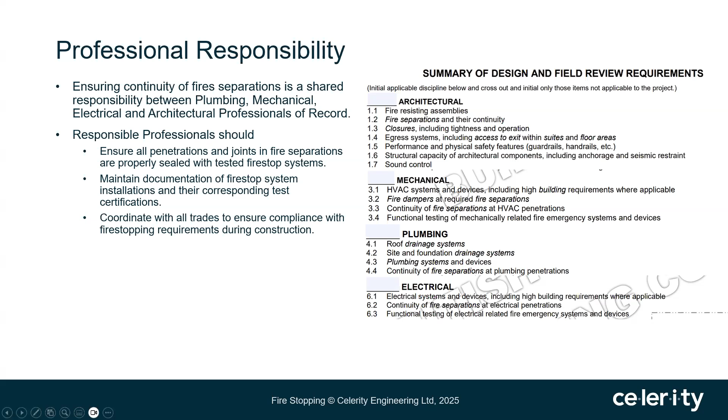So today we're going to talk about fire stopping, primarily Part 3 requirements. Part 9 also covers fire stopping - much of it's the same, but there are a few differences. We will focus on Part 3 though, so if there are some differences that Part 9 covers, we won't really talk about it. We might point out a few here or there, but it's not really going to be the primary scope of this discussion.

We'll primarily talk about continuity of fire separations, and we'll look at the different types of penetrations that are affected and require fire stopping: 4 main ones - construction joints, perimeter fire containment, service equipment penetrations, and membrane penetrations. Any other type of closure used to maintain the continuity of fire separation, such as doors or wired glass or dampers, etc., won't be covered in this.

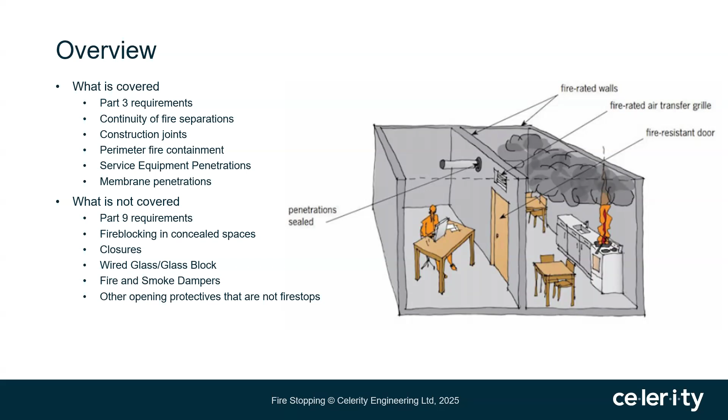So we'll start off with discussing some key terminology. First being fire separation - I've already said it a few times. It's a construction assembly that acts as a barrier against the spread of fire. There are 2 main types: a horizontal fire separation and vertical fire separation. Horizontal fire separations are things like floors, ceilings, and roofs. They resist the spread of fire vertically, from story to story, whereas vertical separations are things like walls and partitions that prevent lateral spread of fire.

Quick note that some other regulations refer to horizontal and vertical fire separations as well, but might refer to them kind of in the opposite, saying that a horizontal fire separation prevents the spread of fire horizontally, which can lead to confusion. So just beware - you guys will primarily be dealing with the BC Building Code, but if you are reading some other supplementary documentation, just be aware of the terminology used there.

When the code refers to fire, it refers to all products of combustion - so that includes soot and smoke and heat, which is important because not all fire separations require a fire resistance rating. These are often referred to as smoke separations, and this isn't always directly addressed in the building code. However, it is good to know and good practice that if you do have a 0 hour fire separation, you may not necessarily need fire stopping, but you should, as good practice, provide some type of smoke seal so that smoke leakage doesn't occur through that separation.

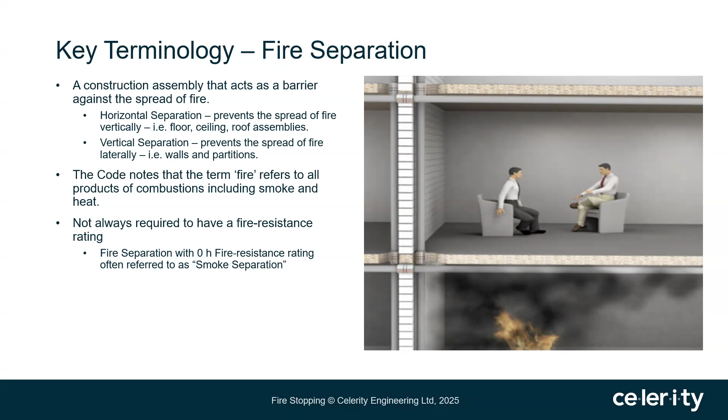Fire resistance rating is the time in minutes or hours given to a construction assembly that's been tested in accordance to CAN/ULC S101. It's the time that assembly will withstand the passage of flame through it. Rating can also be assigned on the basis of Appendix D in the building code - there's an appendix at the back where you can essentially add different components of an assembly, say wood studs with a gypsum wallboard membrane, and attain a fire resistance rating based on that. That's based off of testing of individual components and not the assembly as a whole, so often those ratings will be a little bit more conservative.

There are also assemblies in Part 9 - Table 9.1.10.3 A and B. Part 3 allows the use of some of these assemblies, namely M1 and M2 ceiling membranes and the C1 ceiling assembly. However, any other assembly is not permitted. So this is another important note - it's fairly common for us to see architects specify a wall assembly in a Part 3 building from Table 9.1.10.3, and this is generally not allowed. I will just clarify that the STC ratings from those assemblies can be used, but you should be very careful when doing that, especially if that assembly does need a fire resistance rating.

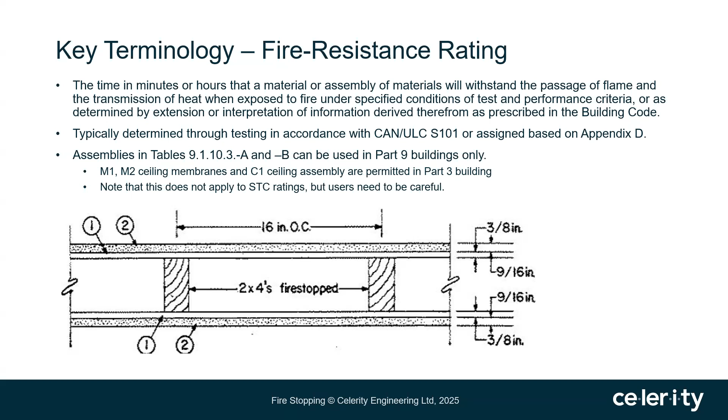We'll also just quickly define the term membrane. It's not defined in the BC building code, but will typically refer to the outer layer of finishing material on a construction assembly. In the diagram below, you can see the gypsum wallboard membrane on the outside of this assembly is what's referred to as the membrane. It can also be lath and plaster, cement board, plywood, or a variety of other materials.

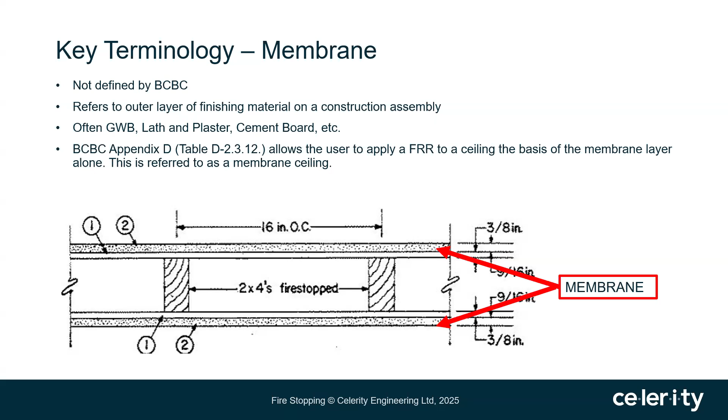Firestop. This is a system of materials and components used to fill the gaps between fire separations themselves, so wall to wall or wall to ceiling, or between a penetration through that fire separation, such as a pipe, conduit, or duct.

It's critical for maintaining the integrity of fire compartments. Fire compartmentalization is a key way that the building code implements passive fire protection to prevent the spread of fire throughout a building. The critical aspect is that the integrity of those compartments needs to be maintained. That could be through closures, through fire resistive construction, and for the sake of this presentation, fire stopping of penetrations and joints in those fire separations.

Fire stopping must comply with CAN ULC S115 testing.

It can also be cast in place. The code has a note that clarifies what cast in place means, and it's used to reinforce that there shouldn't be any gaps between the building service or penetrating item and the membrane or assembly it penetrates. Typically, it means fire stopping for service penetration through something like a concrete slab or concrete wall.

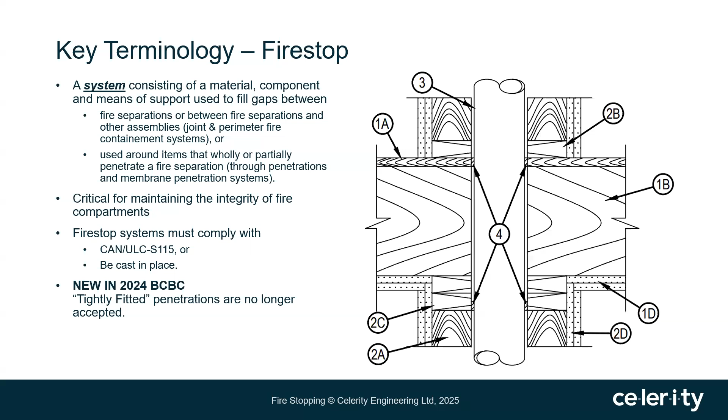The testing used to determine the fire stopping rating is called CAN-ULC S115. Essentially, the fire stop systems are subject to the standard fire conditions within a furnace and subject to the standard ASTM time temperature curve. It's important to note that these are fire stop systems.

You might see a contractor or someone refer to fire stop as a caulking or a collar. That's one part of the system, but by itself does not provide an F rating or an FT rating. The whole system, so a specific wall assembly with a specific type of penetrant and a specific material used to seal the gaps, that's a system if it's been tested to S115 and achieves some type of performance criteria. So be very careful when reviewing these types of systems and make sure there is an existing listing for it.

Testing with S115, there are several different ratings that can be applied. The two most important are F and FT ratings. F is the fire endurance test, the time in hours that a fire stop system will prevent the passage of flame through openings in the barrier, whereas FT is the heat transmission test. In addition to the F rating, it also requires that the temperature of the unexposed side doesn't exceed 181 degrees Celsius above the initial temperature.

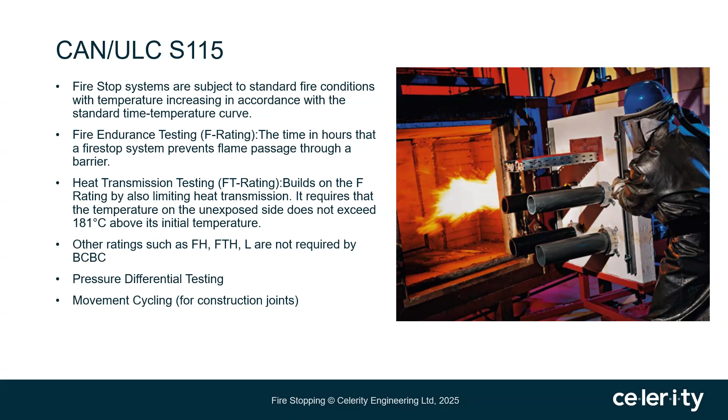So where are fire stop systems required? There are two main subcategories of fire stop systems. First, joint systems - these protect from fire spread through joints of fire separation, such as wall to wall, wall to floor, or wall to ceiling joints. Second, there's fire stopping of penetrations. These could be through-penetrations, going all the way through an assembly, or membrane penetrations, like a pipe contained within a plumbing wall except where it comes out to a drain for a sink.

There are other opening protectives available, such as closures, smoke dampers, and fire resistant glazing. We won't really talk about these. Wherever else the continuity of a fire separation needs to be maintained, typically a fire stop system is used to maintain that integrity.

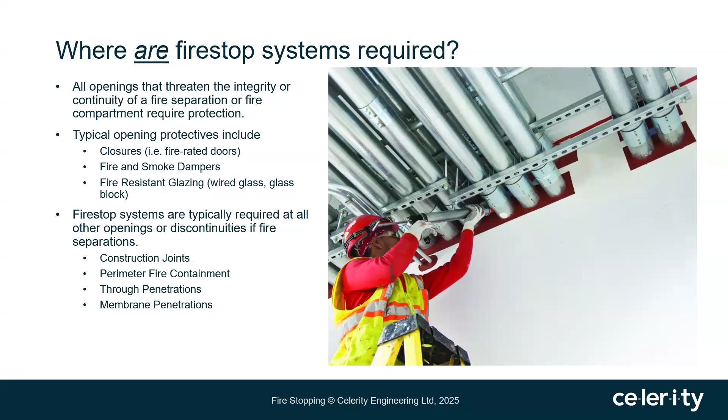There are a few areas where continuity can be maintained without requiring a fire stop system. First is sprinkler heads - provided an escutcheon plate is provided in accordance with NFPA 13, you won't have to fire stop that penetration. But it's important to note this only applies to the sprinkler head and not the sprinkler piping. The piping would still require fire stopping.

Fire dampers are another situation where you don't necessarily need fire stopping. Often the fire stopping can impact negatively the operation of the fire damper, so you'll often see them installed without it. However, there are some situations where dampers are specifically designed to be installed with a fire stop, so you should always double check installation instructions and data sheets to confirm if that's required.

Smoke separations, which we also talked about a little bit, are essentially 0-hour rated fire separations. They don't require fire stopping, but as I mentioned before, it's good practice to make sure a smoke tight seal is provided wherever the continuity of those separations may be impacted.

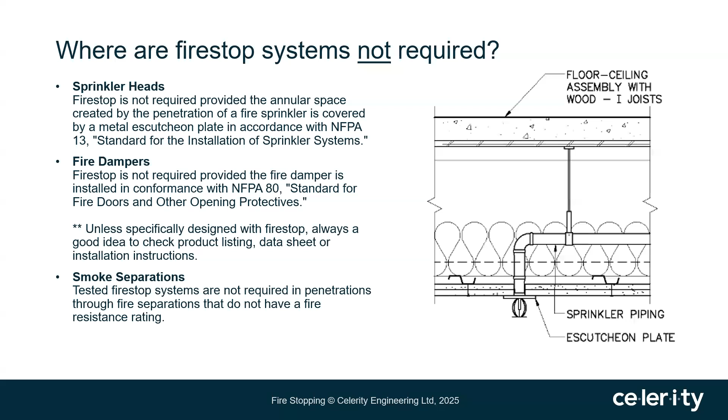So we'll start with joint fire stop systems. These can be broken down into two different categories: typical joint fire stop systems between walls and ceilings, or floor to floor, and perimeter joint systems. We'll start with just a regular joint fire stop system.

General rule of thumb, these need to have an FT rating - that's the flame through rating, F, and then the temperature rise rating as well, T.

The BC Building Code was rewritten a bit under the Continuity of Fire Separations, article 3.1.8.3. In general, most of the 2024 updates to continuity of fire separations and penetrations through fire separations mainly revolve around increased clarity around test requirements for these separations and fire stopping. Previously, requirements were a bit ambiguous and up for interpretation - the wording was that continuity was allowed to be maintained by filling all openings at a juncture of an assembly with material that will ensure the integrity of the fire separation at that location. So it was kind of up in the air and at your discretion what type of material would ensure that integrity.

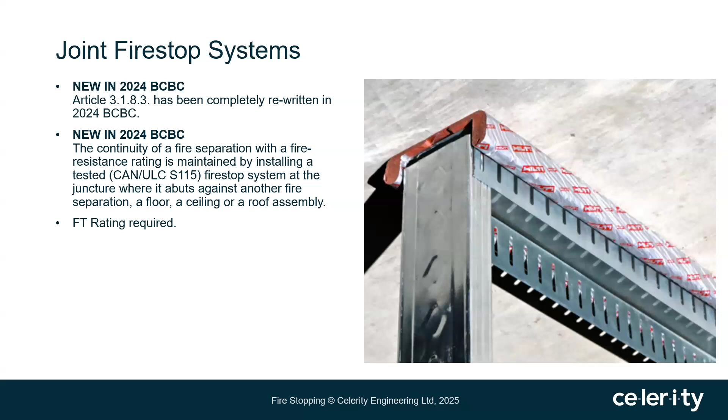So FT rating isn't required everywhere. It can be waived for joints between ceilings and walls, floors and walls, and at wall corners where gypsum wallboard is used and attached to the frame in a way that would restrict flame and smoke passage.

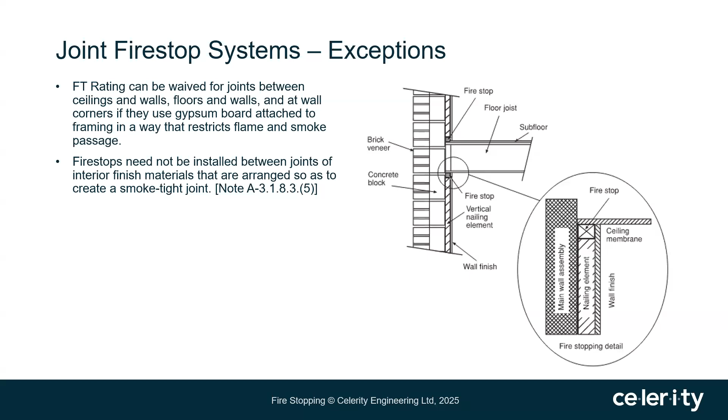Further, joints between interior finish materials - say you have two gypsum wallboards attached to some framing, where those gypsum wallboards meet - fire stop isn't needed at all as long as smoke tight joints were created. So as long as it's mud and taped appropriately, for instance, that's typically sufficient. You wouldn't need any additional type of fire stopping.

This specific system is WWD009. I don't expect that to mean much to you, but you can look these systems up. If you are looking for a specific system, you can find them on UL's website, UL Product IQ, and we can go through one together. The website is iq.ulprospector.com.

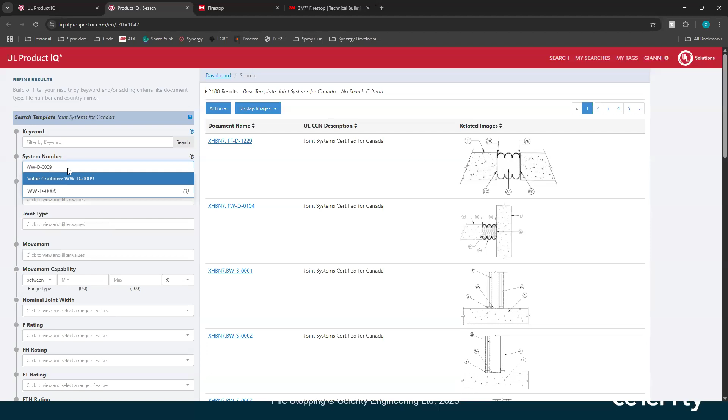In this case, we'll just put in the one we're looking for, WWD 009. It should come up as this one option. This is it. When you're navigating these, it's always good to check that it is certified for Canada. When you're specifying this, say in a drawing, typically all you need to note is the system number, and the contractor should know where to look this up and find the details of construction so they can apply them.

At the top, it'll give you all the ratings. In this case, it's got an assembly rating of 4 hours, nominal joint width of 2 inches, and class 2 and 3 movement capabilities.

Then the details of the actual assembly are below. It'll provide, like I mentioned earlier, the Firestop doesn't just refer to the materials used to prevent fire passage through the assembly, it's the entire system because it's tested as a whole. So the wall assembly has specific requirements that must be met for this Firestop system to be compliant: minimum 5-inch thick, reinforced, lightweight, or normal weight structural concrete, or UL classified concrete blocks. That's number 1 here. 2, A and B, is the actual joint system.

So you'll need a forming material, minimum 4 PCF mineral wool insulation. There are additional requirements as well. And then a fill or void cavity material. This is often a proprietary material sold by whoever, it might be Hilti or 3M. In this case, it's Tremco Incorporated.

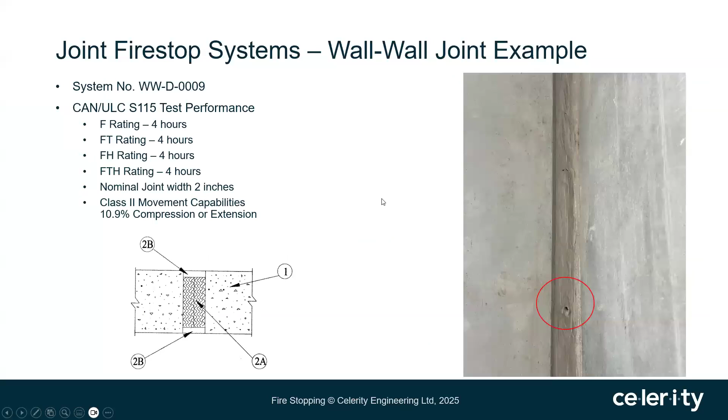Another last type of joint system is the perimeter fire containment system. This is typically what you'll see at a wall joint, a curtain wall joint, or exterior wall and floor assembly.

BC 2024 Building Code introduced an actual test for this. Previously, it wasn't as well defined. Now these joints must be tested in accordance with ASTM E2307.

It's similar in some ways to S115. You use the same fire or time-temperature curve of ASTM E119. However, it does vary in a few key ways, namely that it's actually an intermediate scale test. You use a multi-story apparatus and real fire conditions to test the joint and assembly.

Similarly to S115, you also apply cycling to the joint to simulate real world movements that you would expect in a building joint.

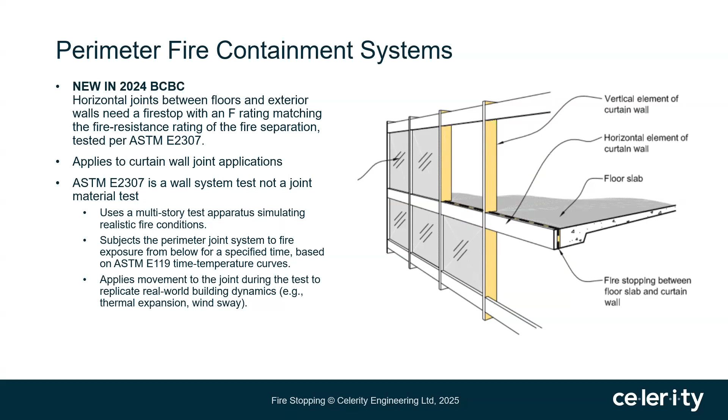Next, we're on service equipment penetrations. You may not necessarily be the one specifying the fire stopping detail for equipment penetrations. This will often fall under the mechanical, plumbing, or electrical engineer. But it's good to know the details so that when you're on site, you know what to look for. For instance, if you've specified a fire separation at a certain floor assembly, you should be looking for penetrations through that assembly and making sure a fire stop system is being provided.

So for service equipment penetration specifically, typical requirements or general rule of thumb is that they'll have to be F-rated at minimum, and they should be non-combustible. However, there's exceptions to both of those.

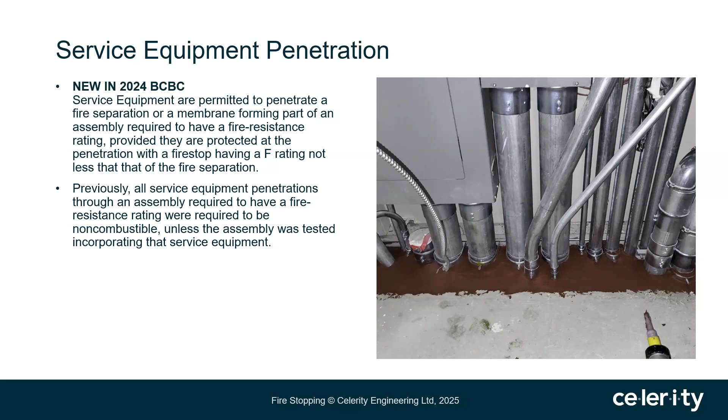Some special cases where you would need more than an F rating are firewalls and 3212 slab penetrations. In both these cases, you'll need an FT rating. Firewalls are essentially fire separations with some enhanced protections that separate buildings, and FT ratings will be required through these separations.

3212 slabs are basically floor assemblies above basement parkades that are common amongst several above-ground structures, which is useful because it can allow you to design those above grade structures potentially with less onerous construction requirements. However, the separation between those above grade structures and the below grade parking garage does need the enhanced protection of a 3212 slab. So the slab will generally be a 2-hour rated concrete slab, and penetrations through it will have to be FT rated.

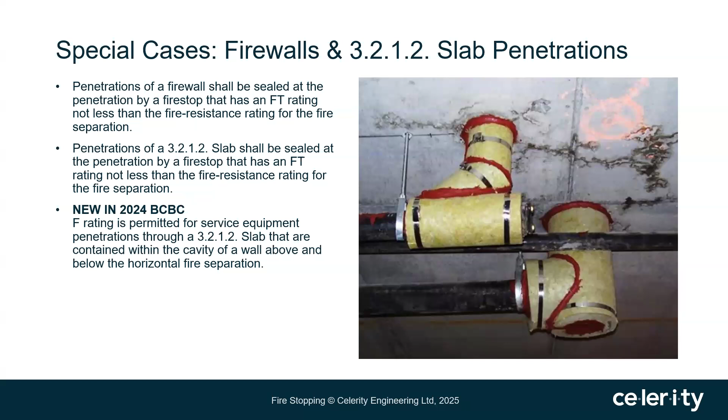The one exception is that if these penetrations are contained within the cavity of a wall above and below that 2-hour FT rated slab, only an F rating would be required. It's not super common, but it may come in handy if you end up having a fire stop that was provided that's only F rated. An option may be to just enclose the penetration in a chase wall, for instance.

Another special case where FT rating is required is horizontal service spaces. Generally, under the continuity of fire separations article 3.1.8.3, this type of vertical fire separation will need to be maintained even through a horizontal service space that separates it. So you would have to construct an additional fire separation within this horizontal service space to maintain the continuity of the vertical wall. However, Article 3.6.4.2 allows you to omit that and maintain a continuous service space below.

However, you have to provide an FT rating for fire stopped systems within that space. There are 4 scenarios where you can waive the FT rating and only provide an F rating.

The first is when the fire stopping system or the penetrations are contained within the cavity of a wall above and below the horizontal fire separation. That's similar to the 3212 slab exception. So in this case, you have the vertical wall and the equipment penetrations contained within that cavity above and below the horizontal service space, and so only an F rating would be required here.

Second is where the concealed space of the floor ceiling assembly has a fire resistance rating, for instance something like a fire block. So the service equipment penetration is entirely within that horizontal service space, and if that space has a fire resistance rating, no FT rating would be required, just the F rating.

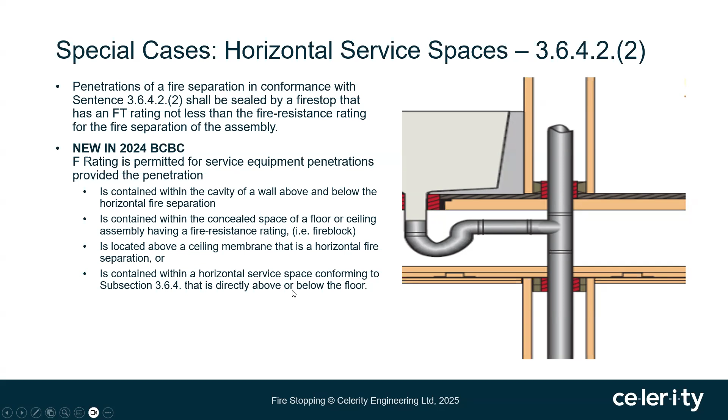As I said, non-combustible piping is generally the rule, but there are exceptions. If you do want to use combustible piping, you have to be wary of potentially requiring a 50 Pascal pressure differential rating applied to the Firestop. So the Firestop, when tested, has to have a 50 Pascal pressure differential applied from the exposed and unexposed side and still achieve the same F or FT rating. This applies to water distribution piping, drain, waste, and vent piping, and central vacuum system piping.

Combustible sprinkler piping is generally permitted as long as the two fire compartments are sprinklered. Under NFPA, typically the entire building would be sprinklered, so this is often the case. But be careful with situations where you have, say, an electrical room. Electrical rooms, you can sometimes omit sprinklers in there, and so in that case, no combustible sprinkler piping should be provided.

One other note: the 50 Pascal pressure differential testing only applies to buildings that are more than 3 stories, which is a new thing in 2024.

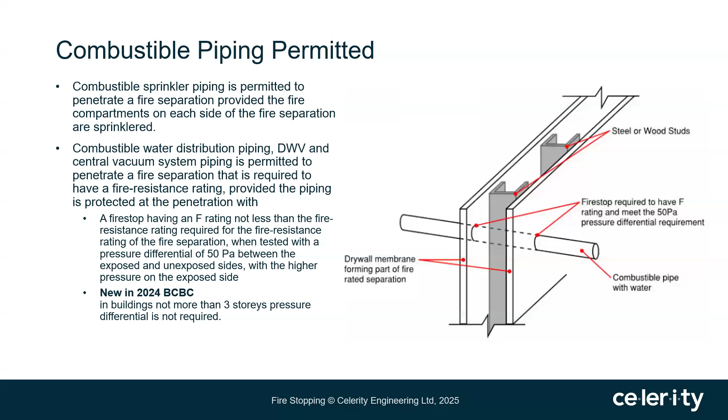The location of this pipe is also something to be careful with. Typically, combustible drain, waste, and vent piping should not be provided in vertical service spaces or shafts. Same thing with central vacuum system piping. Water piping can be contained in vertical service spaces. If you do, you can use a combination.

You could transition, say, between combustible and non-combustible drain piping, for instance, as you can see in this example. Within this vertical shaft here, you have non-combustible piping, but as you transition out and into the spaces, you use combustible piping. This can make things cheaper, but you just have to be careful with the fire stopping that you're using here. It will need that 50 Pascal pressure differential applied.

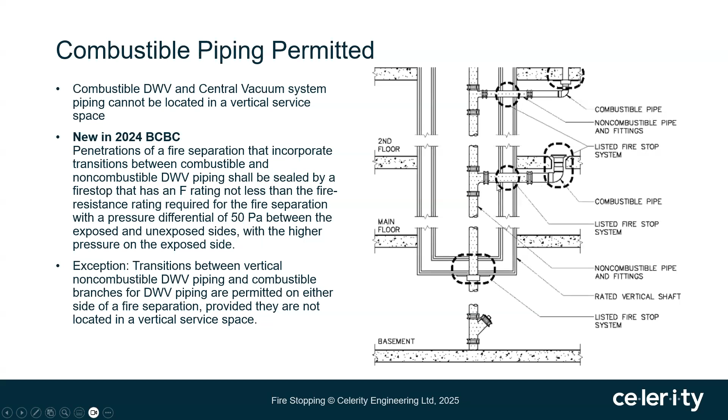Electrical services such as wires and cables are typically pretty much the same as piping. Just an F rating is required. Where you're using combustible totally enclosed raceways, it's permitted in a concrete slab, but you need to maintain a 50 millimeter cover.

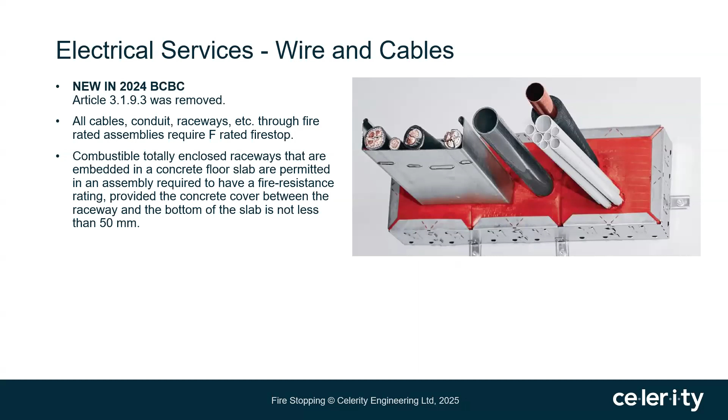One situation that's not really explicitly covered in the BC Building Code is structural member penetrations. Also, where a structural member is, say, penetrating, the structural engineer doesn't really have an obligation to maintain continuity of fire separations - that falls under the architect. So it's good for you guys to be looking for this type of thing on site. If you do see, say, in this case, we have a stair shaft that's being penetrated by some structural beams.

A fire stop system is required to be applied here, and just an F rating. There are ULC listed Firestop systems available for this, but in some cases, engineering judgments may be required.

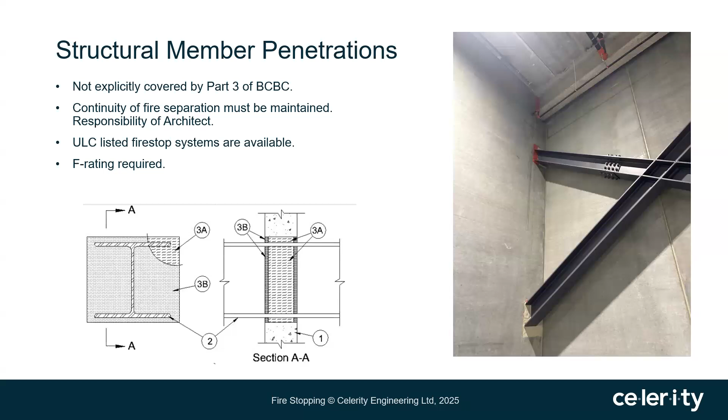So one example of a structural member penetration, CAJ 2008. Again, we can go back to Product IQ. This time we're going to Firestop systems for Canada. Again, if we know the number, we can look it right up. However, if you're looking for general systems, you can also filter by whatever specific details you're looking at.

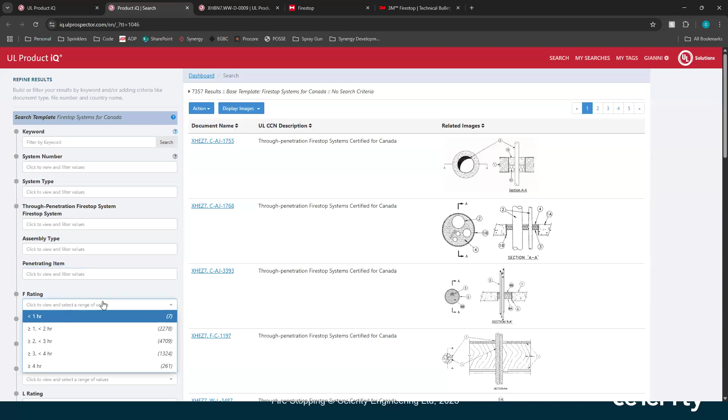So there's a variety of different penetrating items: non-metallic pipe or conduit, so that'll be combustible piping, generally metallic pipe, conduit or tubing, insulated pipe, etc. There's lots of options - you can filter by F rating, FH rating, FT rating, kind of whatever you want. In this case, the name of our system is CAJ 2008. So here it is. Again, always look for certified in Canada, that's critical.

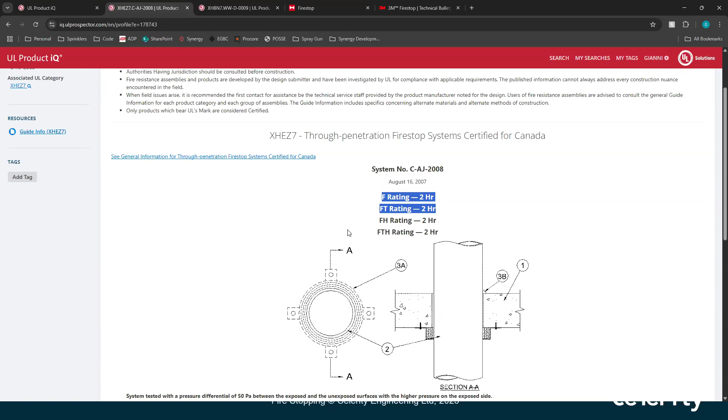This particular product has a number of ratings available. F and FT ratings are usually the ones we're looking for, and in this case, just an F rating would be required. This is combustible, so another thing to look for - this 50 Pascal testing is explicitly stated. If you're using combustible piping, that's really important to check for that.

So it'll specify again, as it's a system, the floor or wall assembly being used. One thing to keep in mind here, often especially with wall assemblies, a lot of these details will specifically refer to other listed wall assemblies, like a U300 series or V400 series type of wall. So there may be additional requirements for that wall construction that aren't necessarily listed in the Firestop system listing. Make sure that when you're specifying these systems, all the aspects that are specified within here are being adhered to. So if it asks for a U300 series wall, make sure that the wall being used meets that description.

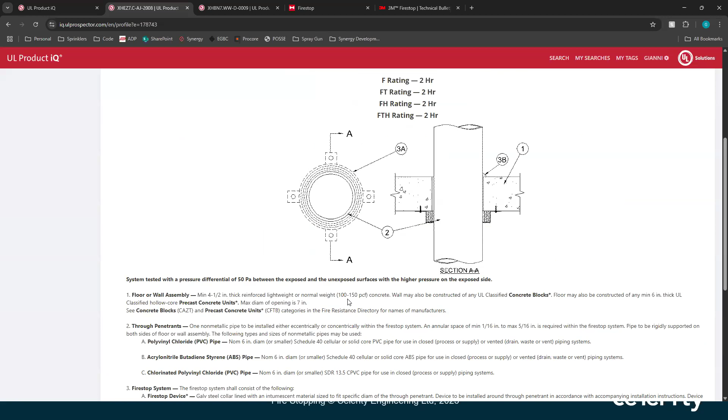Again, you'll see the penetrants here - this is the different types of materials and penetrants you can use. There's typically a maximum size available, schedule 40, etc. It'll specify the annular space - that's the space between the pipe itself and the wall assembly or floor assembly, the gap essentially between the pipe and the wall. And then the Firestop system - in this case, it's a collar. Again, only one available material here or manufacturer, so it's good to have some backups or different options available. In this case, this is fairly generic. There's a number of different listed assemblies that say a 4.5-inch thick reinforced concrete floor with these same penetrants.

Sometimes it's also useful to look up the manufacturer directly. So 3M, Hilti, or PFP - all these manufacturers - you can usually look up Firestop listings that use their specific products on their website. I've included a couple links to some of those websites at the end of this presentation with some of the other resources. Good to know where to look for those.

For instance, I think this is Hilti's Firestop selector. It's really nice, really easy to use. This link, again, is at the end of this presentation. You can select whatever you want.

This is for, well, let's go penetration type. We got a through penetration with non-metallic pipe conduit. Say we want PVC, some insulation, and it's going through a floor, concrete floor. We need a 1 hour rating. In this case, it says there's none available, so it requests an engineering judgment - might be because there's insulation. So now you can see there's a number of available listings pop up that all use Hilti's products, and you can go through and cycle different products, and it'll show you the listings that use that.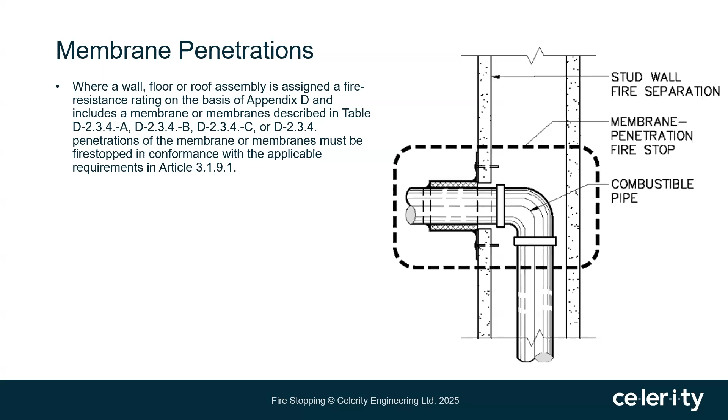Yes, so these are often not used with listed systems. Often you'll see these in fire resistance rated construction that's given its fire resistance rating on the basis of Appendix D. So under tables D2, 3, 4, A, B, C, and D, it gives you the option of providing a fire resistance rating based on an additive component method of applying a fire resistance rating. Be careful with this again, because it can be hard to find UL listed fire stop systems with this type of construction.

Membrane penetration outlet boxes is another type of membrane penetration you'll see. These do require an FT rating. However, it's typically waived based on the size. For a 0.016 square meter area, that's about a 5 by 5 inch area. Typically you'll be okay, but something to keep in mind - if it's greater than that area, then an FT rating is required.

Here's an example. You'll see two different contractors installed this. Obviously one did a much nicer job than the other. Things to look for when you're on site - discontinuity, like this, is not applied very well, and it may be an issue.

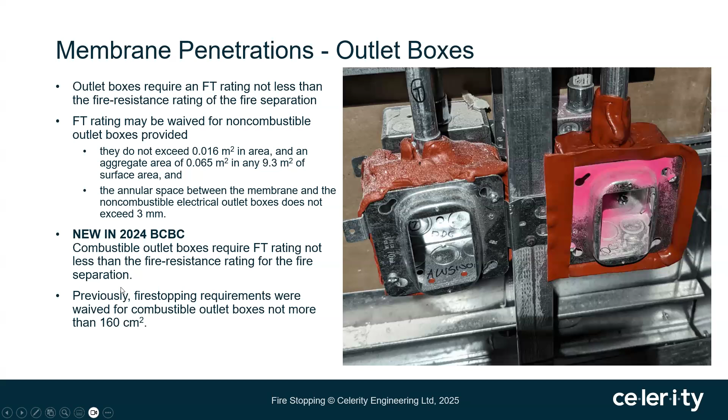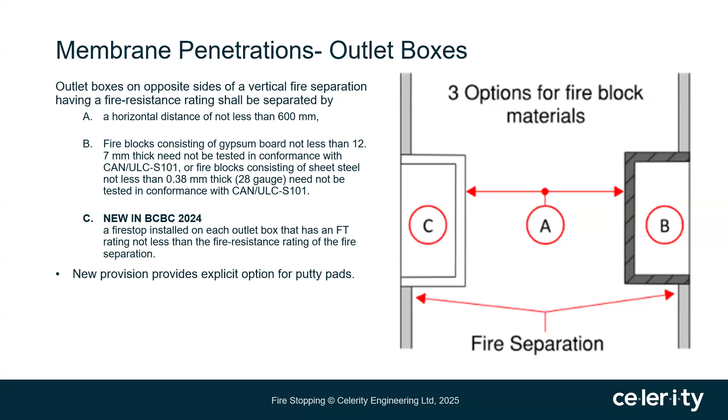Additionally, if you have outlet boxes within a single fire separation but they're back to back like this, there are some requirements for separation between them. At minimum, you'll need a 600 millimeter distance. However, if you encapsulate one of them, or if you encapsulate them with sheet steel, 28 gauge, or half inch gypsum wallboard, that's an acceptable solution. And then new in 2024, you can also Firestop each with an FT rated Firestop system, which is essentially allowing for the putty pad system, which you saw in the previous slide.

Ceiling membranes - so this is another little tricky one. It's same as before, it is a membrane penetration, but where you have a sealing membrane that's assigned its rating on the basis of table D2312 and Appendix D. These are fire separations that aren't really assemblies. The fire resistance rating is only being applied to the membrane material - basically a layer of gypsum wallboard, in most cases.

They require an FT rating, typically because their service space is above them, which is very difficult to apply or get for just a membrane, like a gypsum wallboard membrane. There are no listed systems for membrane ceilings, and so an engineering judgment will be required. So if you are using or applying this in your designs, I strongly recommend coordinating with other designers and the MEP consultants to ensure that you're not providing penetrations through it, because it will likely need the engineering judgment.

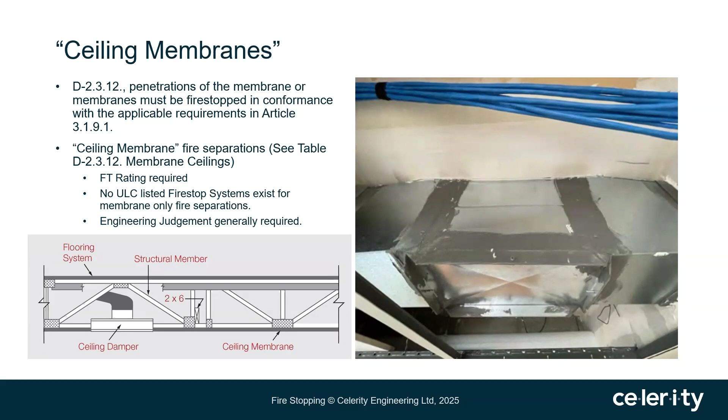On top of engineering judgments, whenever you run into an issue that you can't comply with the acceptable solutions, engineering judgments are viable options. Usually, they'll apply when listed Firestop systems don't cover specific field conditions.

For instance, we have a recent client who has a bunch of materials already ordered on site that they need to use, but those materials don't necessarily comply with the listed systems they need to construct their building. We're providing them an engineering judgment to essentially allow them to use those materials in lieu of a tested system.

They're essentially alternative solutions. Different AHJs will treat it differently. Some you will have to submit it to them for their approval, some that may not be the case, but it's always a good idea to touch base with them first before implementing these to see what kind of process they want to follow.

And not a substitute for listed systems where they exist. If you can just easily apply a listed system, that's always recommended and should be the first path you take. But it's often the case that's not really possible or not economically feasible, so this is a viable route. Do be careful.

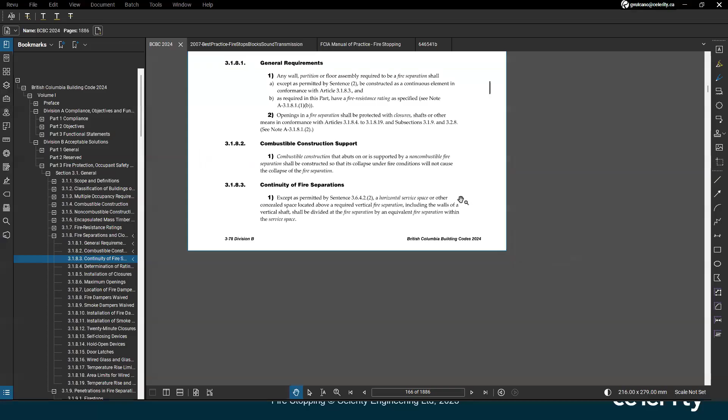One might look like - I think I have one open here. Let's see, yeah, here we go. So this is what one might look like. This is one Hilti developed for a similar structural beam through a wall.

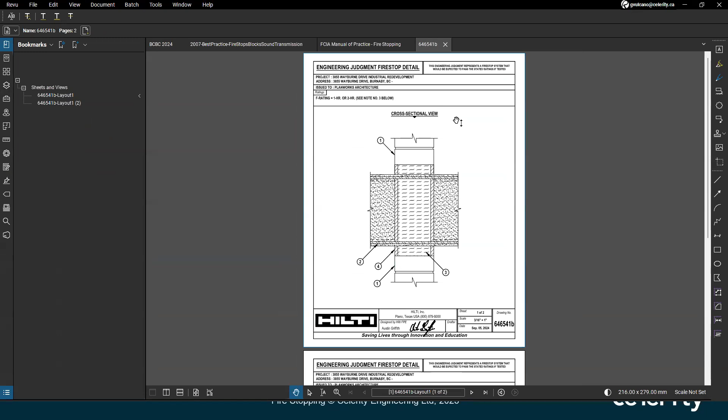This is helpful when you're developing engineering judgments, and maybe your engineering judgment is based off some of these details. But this alone can't be submitted. It needs to be provided and sealed by a registered professional before you can actually use it and have it approved.

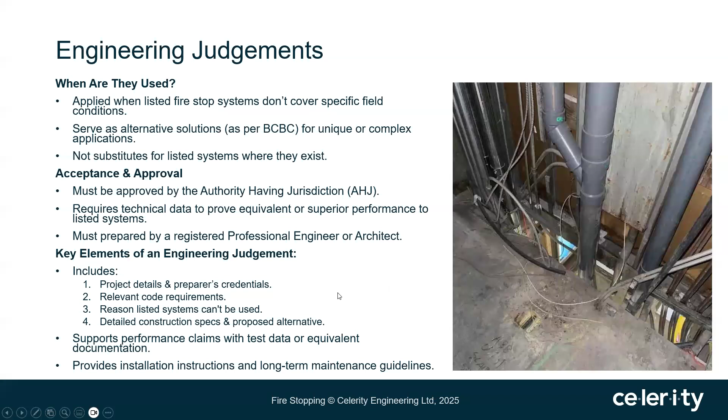That's pretty much it. This is the list of resources. I think we'll send out this presentation to everybody. There's a bunch of links here. The first one is that UL database that I've gone through a couple of times.

I encourage you guys to take a look and play around and do some searching to familiarize yourself with it if you aren't already familiar with it.

Next, two or three links here are a couple of very common suppliers of Firestop systems: Hilti, 3M, Passive Fire Protection. They should all have CAD and BIM details of their Firestops. They might also have 3-part specs that you can use, and all have documentation and a variety of selections of different types of Firestop systems you can incorporate into your designs.

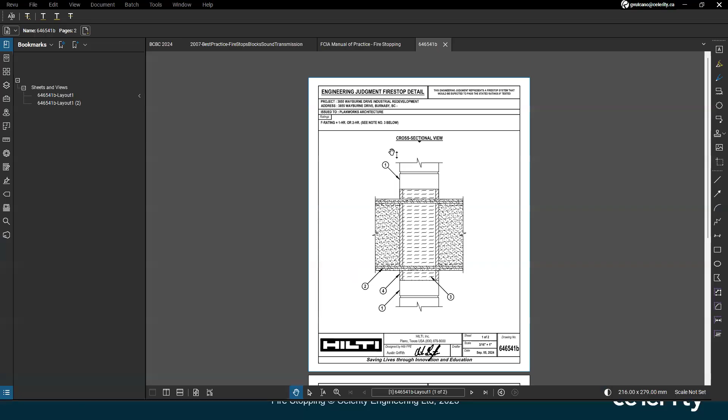The last two here are just some guides. These are very useful. For instance, the 2007 Best Practice Guide - this is a guide you might be familiar with already.

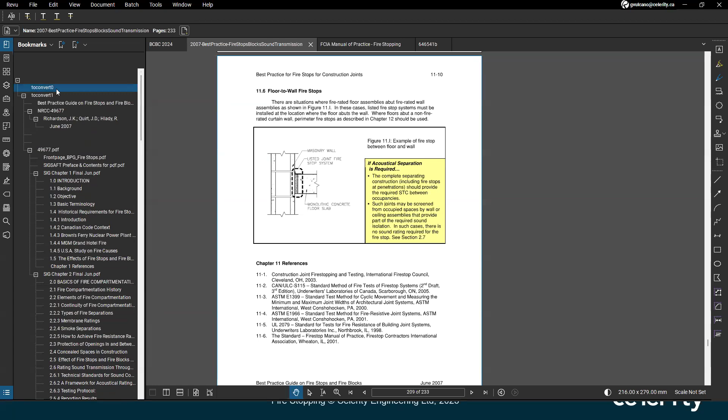It's for fire stopping and sound transmission, published by NRC. It's called Best Practice Guide on Fire Stops and Fire Blocks and the Impact on Sound Transmission. It's about 200 pages and has a whole host of really useful information on fire stopping, different types of fire stopping, where to use them, best practices on using them, different types of materials that can be used.

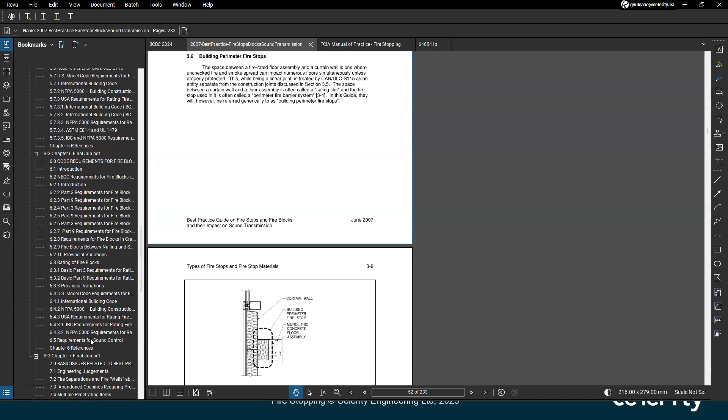Guidance on engineering judgments, and some examples of how and where different types are used. It also goes beyond just the NBCC or National Building Code requirements and looks at some of the other requirements with IBC and NFPA standards. Super useful, lots of information in here. I encourage you to go through this.

There's also the FCIA Firestop Manual of Practice. This should be free to access - you might just have to make a request to them. But again, tons of really good information, 400 pages or so on different fire stop materials, systems and selection analysis. So how to pick fire stops, what to look for.

I think this one is also more directed to contractors, so there's some guidance on inspections and what to look for on site when you're reviewing installed systems. Tons of information here - really great document. Again, links are provided for both of those manuals at the end of this.